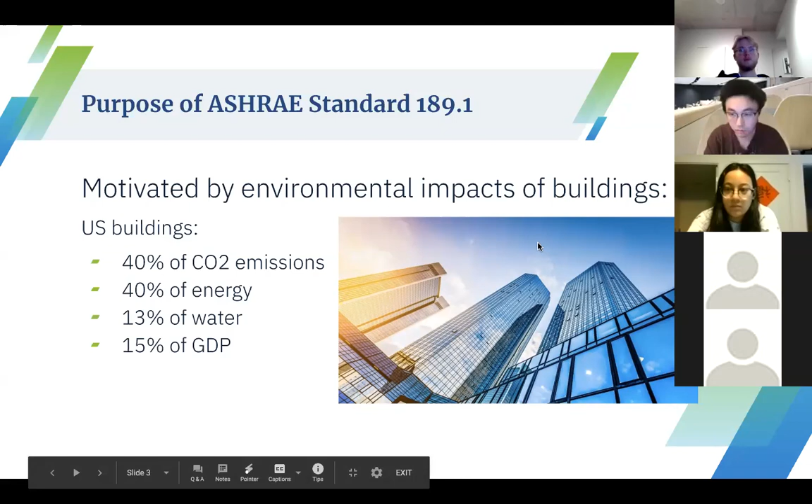Switch to the next slide, please. So the purpose is to create buildings that can increase the environmental and economic performance over time, support the health of occupants, and in doing so, enhance satisfaction and the productivity of the occupants. This is achieved by site sustainability, water use efficiency, energy efficiency, indoor environmental quality, and then the impact on the atmosphere, materials, and resources. We'll go into more detail on each of these in the next few slides.

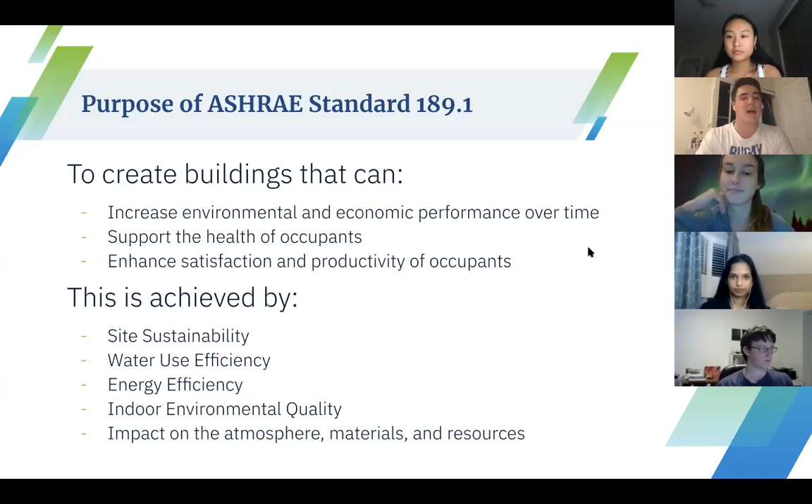The basics is it provides a minimum design requirement for high performance green buildings. And it builds on some of the other codes, such as 55, 62.1, and 90.1. Now, these are not guidelines, but these are actually a standard, and ASHRAE believes they're an indication of future industry trends.

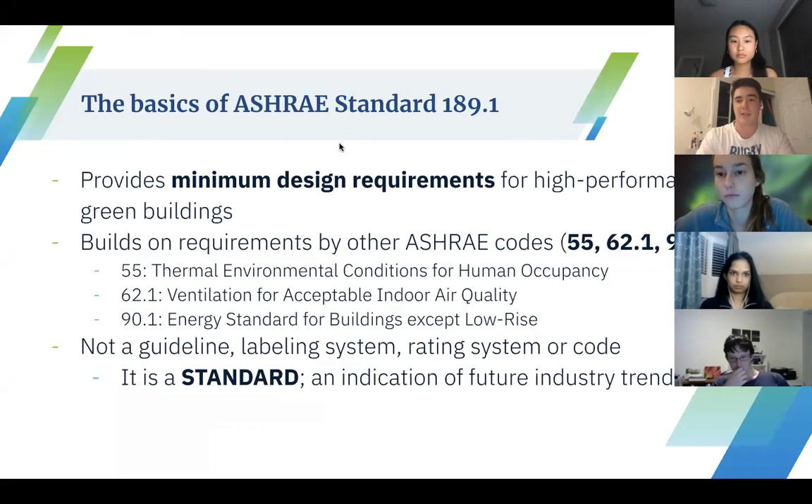So the mandatory elements of this are that it must be built on one of three things. The first is a brownfield, which is a previously developed piece of land. The second is a grey field, which is either an economically obsolete piece of land or an underused piece of land, or alternatively, an existing building envelope.

What it cannot be is on previously undeveloped land, having an elevation of lower than 1.5 meters above the elevation of the 100-year flood, or within 50 meters of any fish or wildlife habitat conservation area. As well as this, it's important that invasive plants are removed from the site prior to the construction of the new building.

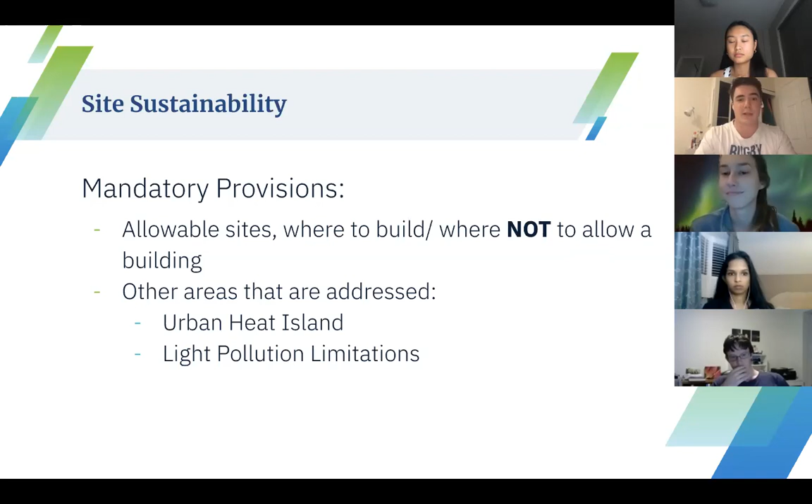Can you go to the next slide, please? Thank you. So there are two major elements with site sustainability that need to be looked at. The first is the urban heat island effect, which needs to be addressed, and there are quite specific measures that need to be taken to do this.

The first one is that 50% of the site hardscape that is not covered in solar energy systems needs to have one of the following: either biodiverse plants, paving materials with a high solar reflectance, open graded aggregate, shading, parking, or a previously existing building that provides shade to this new building.

Walls must be 30% shaded on the east and west, and any vegetation used to achieve this needs to be biodiverse. Roofs must also be 75% covered by either products with a high SRI with a low slope, or if the roof is heavily sloped, it needs a higher SRI.

There are exceptions here for solar panels, heating, and walkways, and this is a good way to save money while still meeting the standard which promotes renewable energy systems.

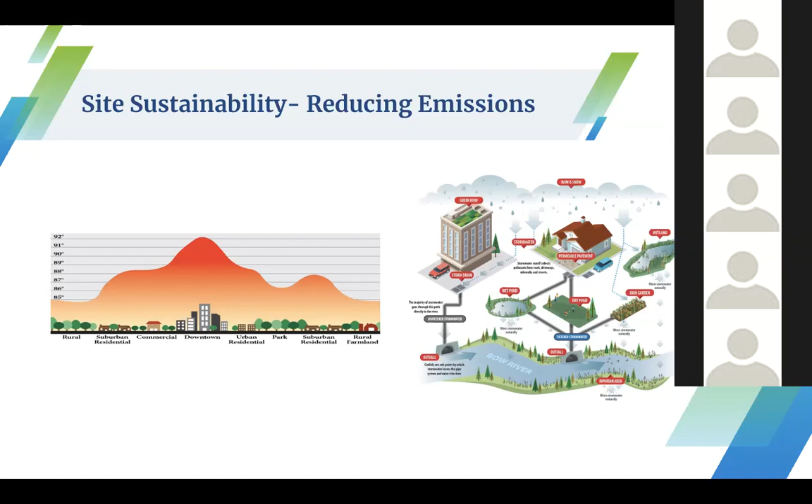Finally, stormwater systems must be provided to the building site. This must be able to manage infiltration, evapotranspiration, rainwater harvesting, and stormwater collection use. It also must be able to achieve a discharge rate of the design storm in under 48 hours. As well as this, contaminated soils are a big problem on brownfields and must be treated to limit the total suspended solids to 25 milligrams per liter.

So the next large part of this particular standard is water use efficiency. Some of the main things that are encompassed in this part of the standard are site water use, building water use, HVAC systems and equipment, and water consumption management. The big thing when it comes to water use is you want to have systems in place, like standards, that allow this water to be consumed as efficiently as it possibly can be.

So some of the systems that are used in water use efficiency include smart water metering, which essentially takes all the different inputs and outputs in water management and makes sure that they're all balanced properly. Depending on the site, if there's a lot of evapotranspiration or a lot of infiltration, this system will make sure that the water is used appropriately in the appropriate places.

One of the big things, especially with landscaping and other water usages that are equivalent to a large portion of water use, is that they can only contain one-third potable water. This means that when you use landscape areas and put water on them, you have to make sure the water used is mostly reused water, which, unless you have a smart system, is really hard to do because you wouldn't have the monitoring system in place.

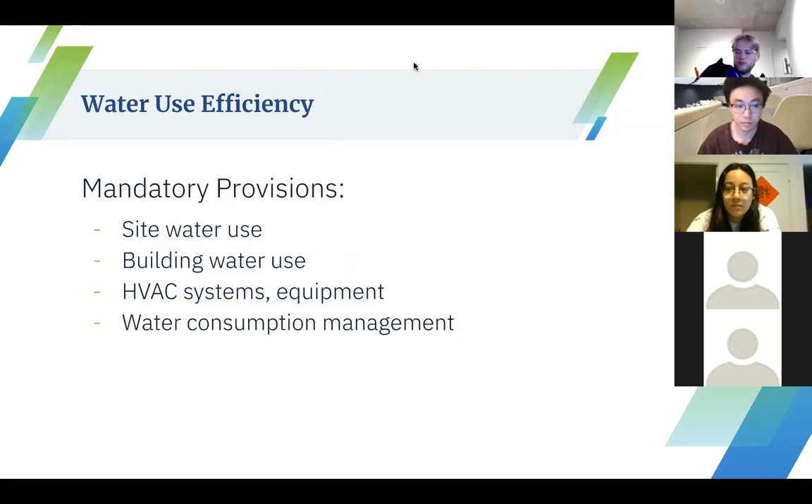Another big thing with water efficiency is Energy Star. Energy Star is a high efficiency rating that the US uses, which basically sets strict energy efficiency criteria and makes sure that you are optimizing the water usage inside of your building. Not only does this save water and energy, but it also saves money that goes towards your electricity bill.

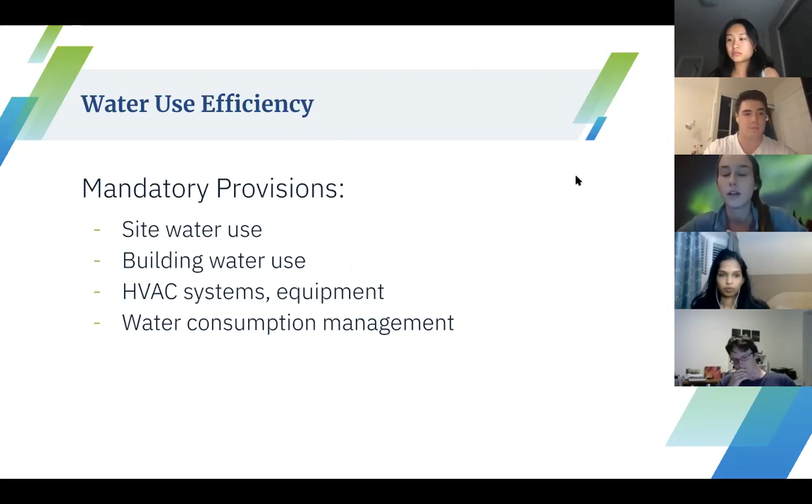So some examples of things you can do to meet Energy Star requirements would be, one, replacing light bulbs for CFLs. And another thing to do with energy is using a 15% less and more efficient fridge, which allows you to reduce your total energy used in a household.

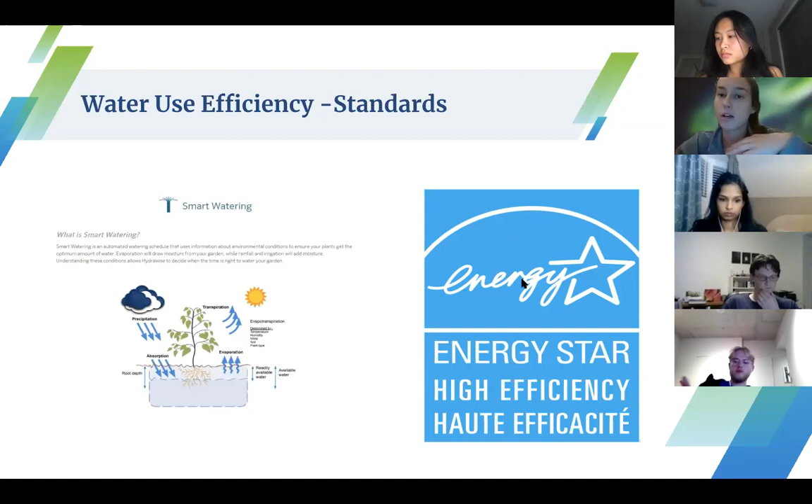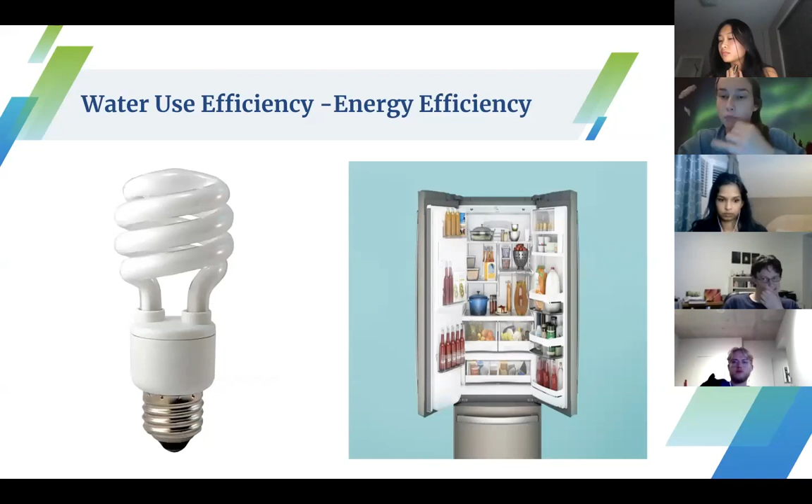Furthermore, a big part of water use efficiency is reusing and collecting. The first system that's really important is gray water, which is essentially when you reuse water that's already been used in your household. You can take the water from different places, such as the washing machine, or anything that didn't have contact with solid waste or anything toxic. That water is collected and then reused in other things that have a lot of water usage, such as a toilet or anything that consumes a lot of water in your household.

And then the other thing is rainwater collection, called rainwater harvesting. This is super important because it basically allows you to collect potable water and store it in a cistern so that you don't have all of your water just coming from the city. You have water that's being collected and used through a system such as natural rainfall, and this will also cut down on your potable water use. Between the two of them, this allows you to use a lot less water in homes, and it's also more efficient in general because you don't have to take all water coming from the distribution system — you can just take water that's already been used in your house or falls on your land.

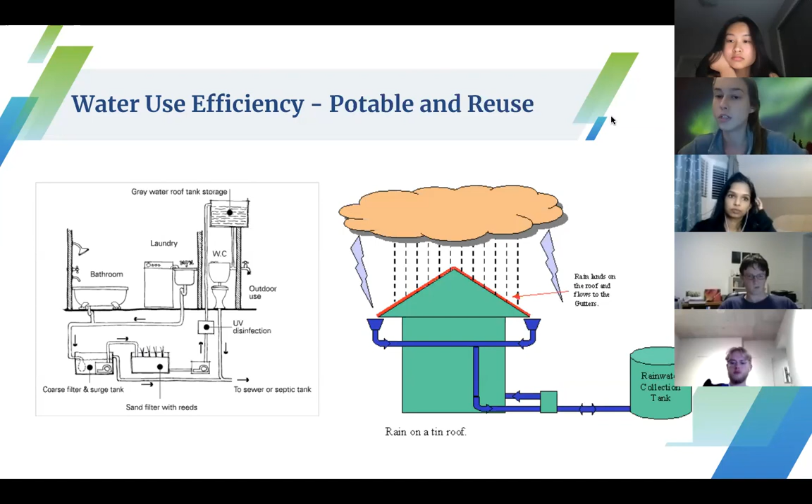The other really important thing about rainwater harvesting is that it also takes water away from the stormwater system, and that's really important because recently we've been having a lot of flooding. So it's really important to have this water go into the building that it's falling on rather than just running off into the streets and flooding things.

So energy efficiency, as Christian said before, part of ASHRAE 189.1 is based on ASHRAE 90.1, which is energy efficiency for buildings. In addition to ASHRAE 90.1, we go into a lot of what ASHRAE wants for energy goals, I would say. Some of the energy goals ASHRAE as a whole strives towards is net zero energy and carbon by 2030, which currently our government is, I guess, going towards very slowly.

Monitoring of progress is based in standardized computer modeling, which is basically knowing how much usage we use in terms of all of our appliances. The most recent goal is to have 189.1 reach net energy use intensity targets by 2020 — that's this year, but obviously that doesn't mean officially net zero. It's just making sure that we have the targets that we want.

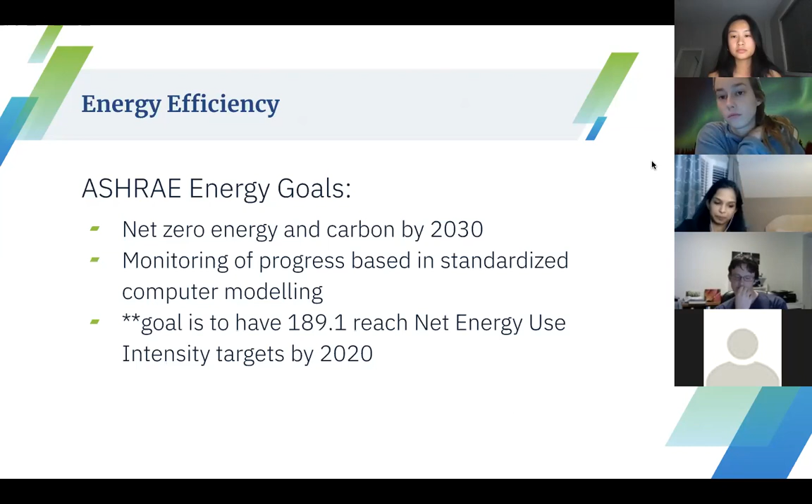Next slide, please. If you look at the graph there, it shows the relationship between 90.1 and 189.1, starting from the mid 1970s. Energy usage across the world has declined due to the stringent standards of 90.1, and even with 189.1, we see a lot of large declines as well.

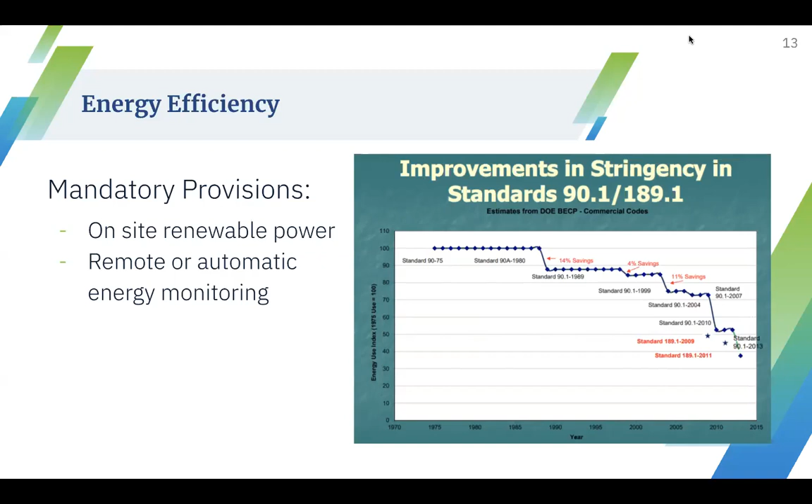The mandatory provisions for this specific category within 189.1 are on-site renewable power, as well as remote or automatic energy monitoring, as we'll go through later.

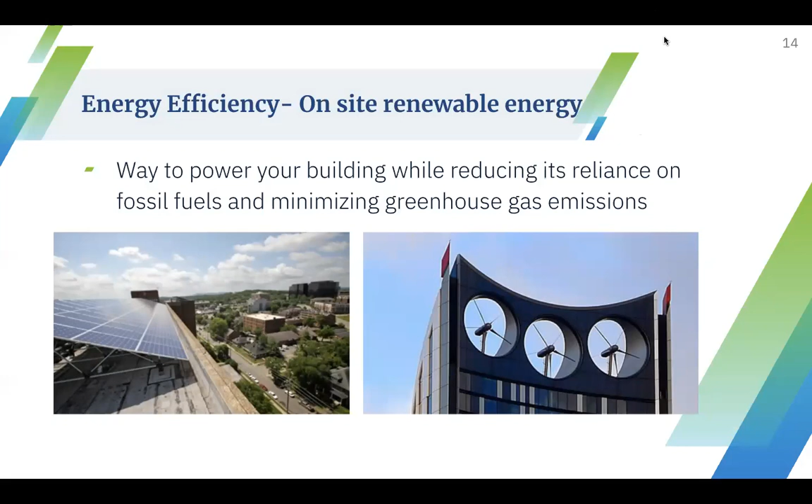Next slide, please. So on-site renewable energy is basically a way to power your building while reducing its reliance on fossil fuels and minimizing greenhouse gas emissions. Specifically, on-site renewable energy could mean PV cells, solar thermal, geothermal, wind systems, or any combinations of those.

Within this category, we want to provide 20 kilowatt hours per meter squared times the gross roof area, specifically because it's so much easier to provide these energy systems on a larger surface within your building site, and most times the only area available is on the building roof.

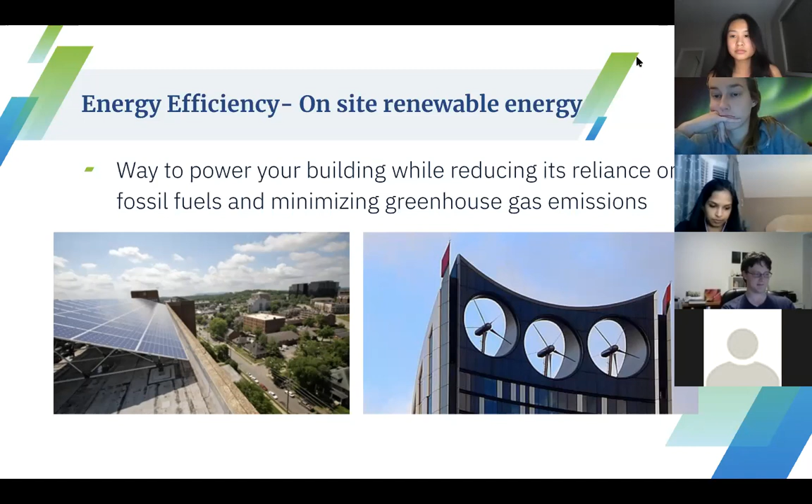If you have a lot of energy efficiency equipment that meet the applicable Energy Star requirements, as Marco talked about in water efficiency, which also apply to energy efficiency, you only need 13 kilowatt hours per meter squared times the gross roof area in order for the on-site renewable energy systems to be applicable. On-site renewable energy plays a very important role in meeting household energy needs throughout the community.

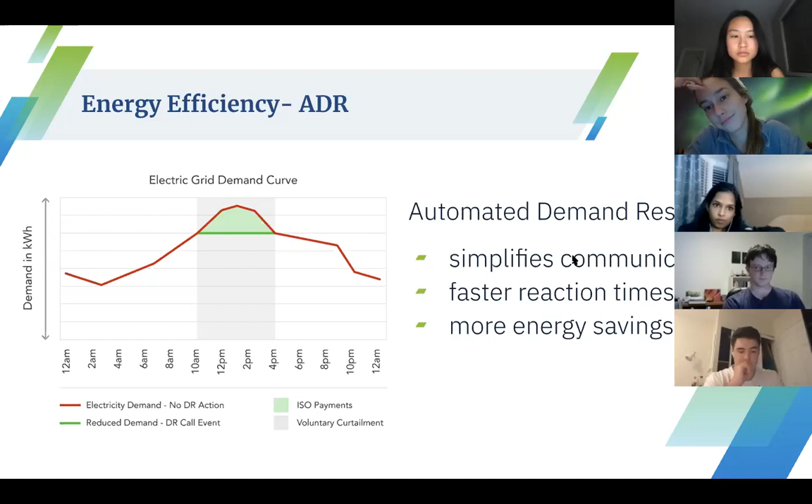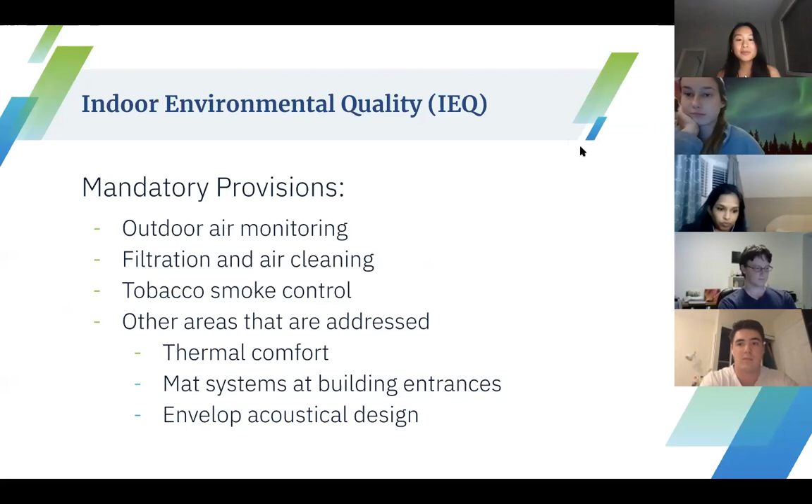So indoor environmental quality - mandatory provisions for this include outdoor air monitoring and tobacco smoke control, and it also addresses areas such as thermal comfort and envelope acoustical design. I'm going to hop in to talk about indoor air quality and how this can enhance building occupants' health, and why it's important to maintain good air quality.

Essentially, air quality is determined by the concentration of particles and gases within the environment. Why is this important, even though air particles are really, really small? Well, while the particles may be puny, it's really important to take care of air quality, because it contains a lot of chronic illnesses, and it carries a lot of health issues that can affect your health.

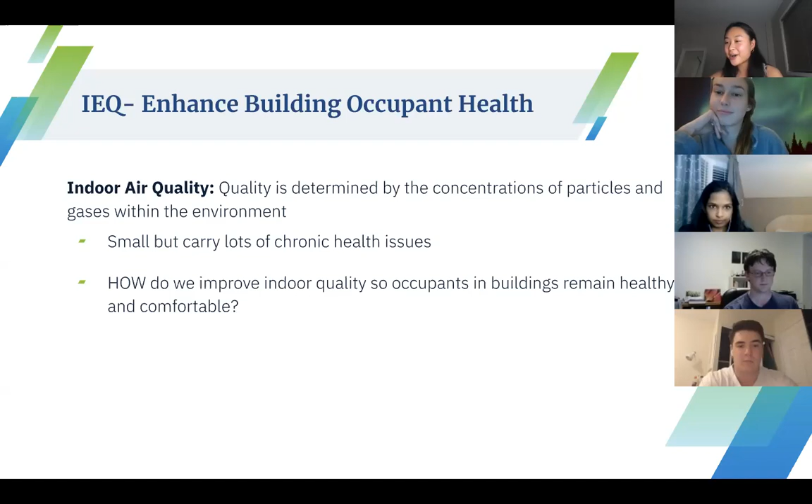To improve this, there are several ways. The first one includes air cleaners. Air cleaners are essentially a device that removes contaminants from the indoor air to improve it. Benefits for this include helping people with allergies, because it removes small allergen particles from the air. It's also good in removing other harmful particles, both chronic and acute. It also removes secondhand smoke.

That's really, really important. However, some difficulties depend on the efficiency of the unit. Essentially it can push back the contaminated air and collect more contamination, which is not good, and you don't want that.

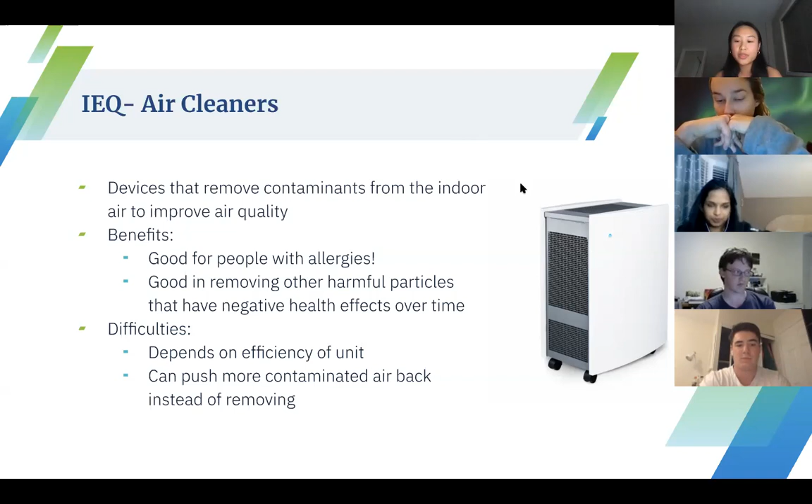The next one includes UV lamps. These are actually really cool - they're essentially ultraviolet lamps that use UV rays to kill bacteria found on surfaces, and mold that can be found in indoor air environments. Our last workshop was actually on HVAC systems, so if you attended that, you'd know a bit more about it, but UV lamps can be used to kill the bacteria found in HVAC systems, because you want to keep your HVAC system nice and clean.

The coil specifically found in HVAC systems can contain a lot of bacteria, so if you keep your UV lamp close to it, it can essentially kill these bacteria before they get into the air that occupies the building. Also, a fun fact - there's been some talk about implementing UV lamps in indoor spaces to reduce the spread of COVID. However, this might not be as effective due to UV lamps needing direct exposure to the virus.

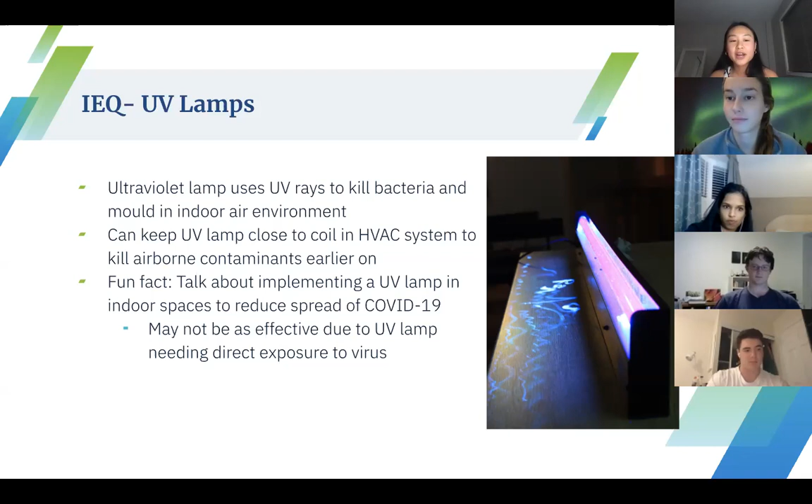But yeah, that's in the air right now. So that was just a little fun fact for you guys.

The last one I'll be talking about that can help improve indoor air quality is humidifiers and dehumidifiers. Back on HVAC, because we love HVAC here in ASHRAE. In the winter, HVAC systems usually have higher temperatures, which dries the air inside the building or home. Dry air can actually lead to respiratory issues for occupants, which is not good for your health. So humidifiers essentially add humidity to the air, usually in the colder seasons, and the ideal range for humidity is about 30 to 40% for buildings, for you to be comfortable.

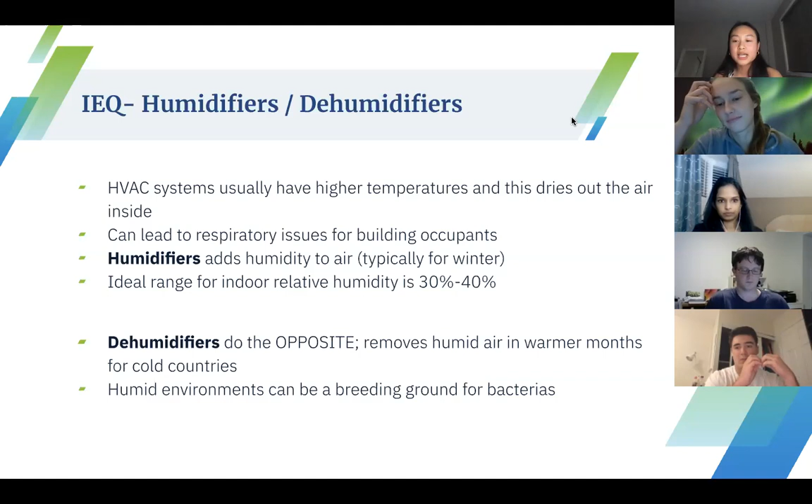Dehumidifiers do the opposite, of course. They remove humid air in the warmer months for colder countries, because humid environments can actually be a breeding ground for bacteria, so we want to take the humidity out as much as possible.

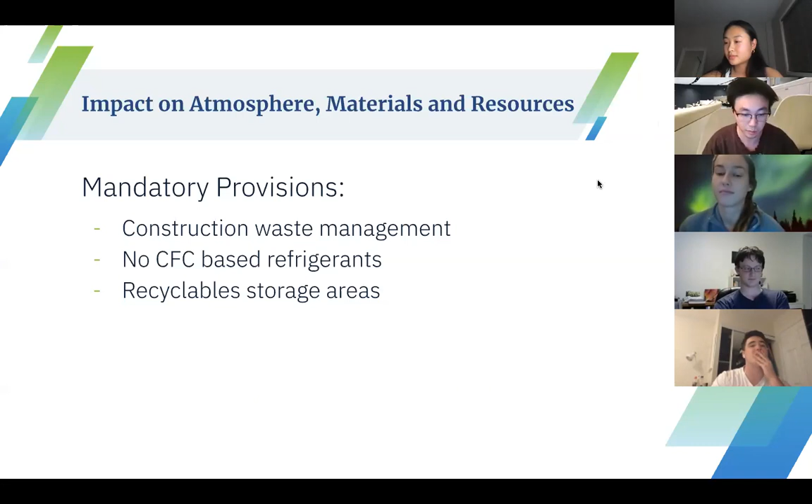I'm going to be talking about the impact on atmosphere, materials, and resources, because we want to be sustainable. The mandatory provisions here are construction waste management, no CFC-based refrigerants, and recyclable storage areas.

Now I'm going to talk about how we want to promote sustainable materials. As you may know, industrial buildings nowadays are made mainly of concrete, and producing and manufacturing this concrete requires a lot of embodied energy. Embodied energy is basically all of the energy required in the process of creating a product from start to finish. Using a life cycle analysis, you can see all the emissions that a product creates, and from this you can see that concrete creates lots of embodied energy, which is unsustainable.

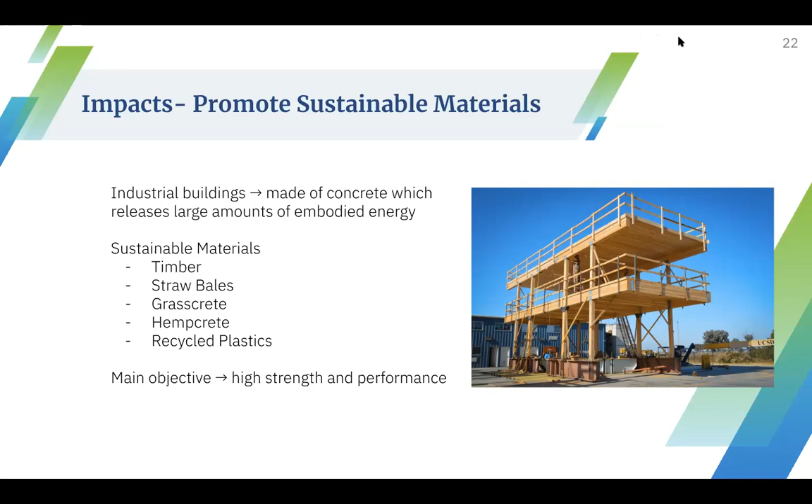Now I'm going to talk about some sustainable materials we could use for construction. One commonly used one would be timber, used in mass timber construction, where the building is entirely made of strong, fire-resistant wood. The difference between mass timber and concrete is that it weighs one fifth of a concrete building, meaning it actually reduces the embodied energy. Another plus is that timber use is sustainable and it absorbs carbon dioxide as it grows.

The next one would be straw bales. This one is a bit weird, but it has been becoming more common in small buildings. It's used inside building frames and can be used as insulation, plaster, or gypsum, providing a high level of insulation. The benefits are that since it's using straw, this material is very cheap, sustainable, and easily renewable. So the next one would be grasscrete.

Grasscrete is basically concrete, but less of it, where greenery and grass is able to grow on the concrete of floors, walkways, sidewalks, and driveways. The main benefits are that we can reduce the amount of concrete and embodied energy, and also improve stormwater drainage and absorption.

The next one is hempcrete. This is basically another form of modifying the concrete. It keeps its performance levels but implements sustainable materials inside of the concrete. It's made by binding fibers from hemp plants to the lime during concrete processing, creating a sustainable building material we can use.

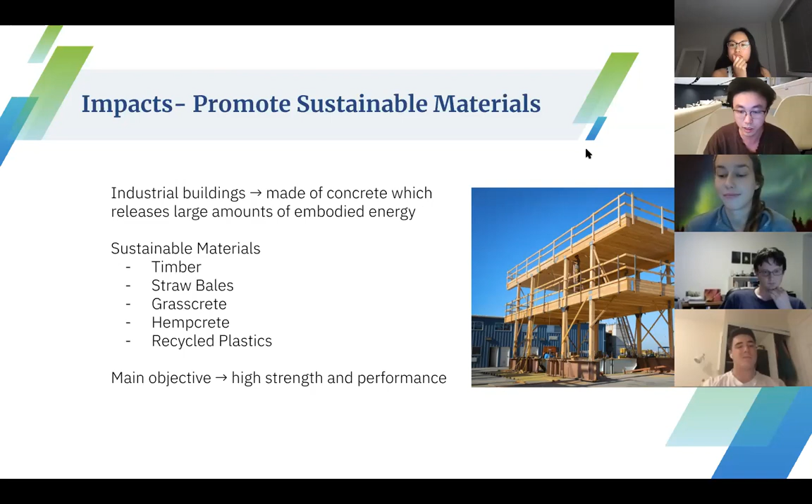The last one is recycled plastic, which allows for a lightweight solution that reduces embodied energy of concrete. Since it's a reusable material, it offers flexibility in designs and is easier to mold so you can get the concrete shape you want. Overall, after talking about all these sustainable materials, the main objective is to keep the structural integrity of buildings, and any sustainable material can be used as long as it has high strength and good performance.

Now we'll be presenting a capstone project from last year, done with my teammates Will Banks, Noah Cassidy, Ivan Priono, and myself. It was about designing a high-performance home in a native community called Attawapiskat, Ontario. We designed the house in terms of the standard, but also a lot of other things. Today we'll just be talking about how it could be relevant to the ASHRAE standard as well.

So safe to say it's a really remote location and transportation up to the site is really difficult. It also has a really harsh climate because it's in Northern Ontario, and it's kind of like a flat plain, so there's lots of wind, lots of snow, and it's just not as warm as Southern Ontario is.

The main issue we were given was to deal with the native housing crisis up there. For those who don't know, native communities actually have a lot of overcrowding issues because lots of families average 6 people per family. They live in these houses pretty much sleeping in the same room as their siblings, families, and parents. This also causes a lot of respiratory illnesses because of mold and things like that growing in the houses, and this also leads to mental health issues, just because they're in these confined spaces with no real place for privacy. So these were kind of the things we were dealing with when we were given this problem.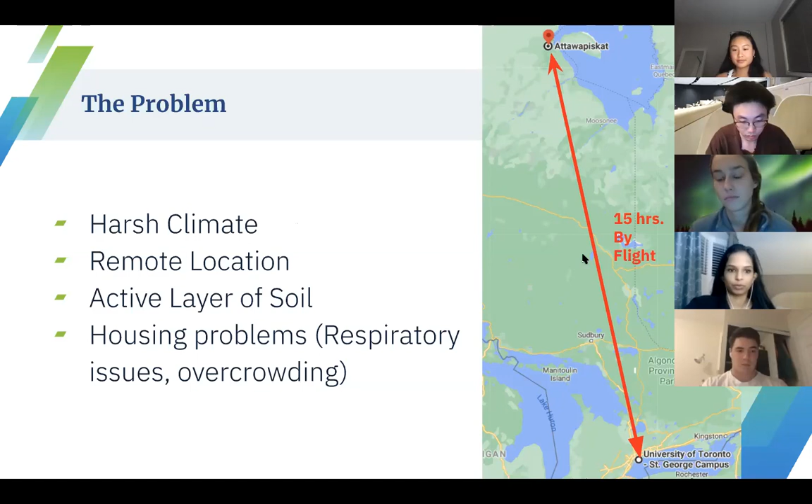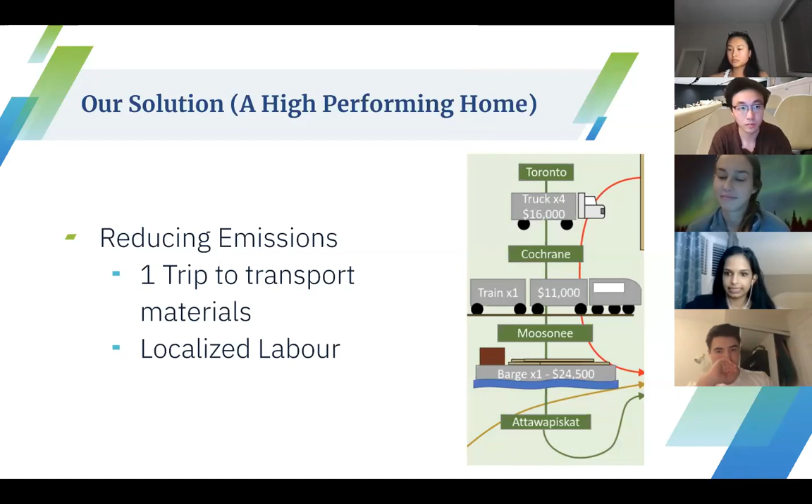The first part was how we addressed reducing emissions. Like we said, the native community was really far north, so if you think back to the life cycle analysis, if things are built out of embodied energy, just transporting them also emits a lot of greenhouse gas emissions. One way we tried to reduce this was making one trip with all of our materials. That required 4 trucks, 1 train, and a barge to get all our goods up to Attawapiskat, so it wasn't just a 15-hour flight. This reduced the number of trips we would take, which also reduced the greenhouse gas emissions.

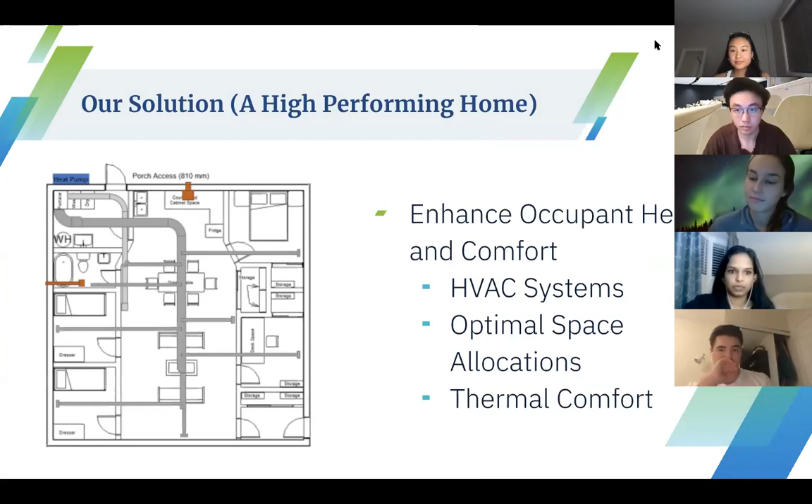Another thing we addressed was enhancing occupant health and comfort. One thing we implemented was a heat recovery ventilator, which we covered in previous workshops. This is the HVAC system that expels stale warm air into the outdoor environment, but as it pulls in new fresh air, it mixes with the outgoing warm air, capturing its temperature so that when it comes into the home, it's fresh air but also warm. This reduces heating costs but also makes the environment a lot warmer.

Another thing we used was a wood stove. This is partially because of cultural practices, since native communities do a lot of cooking with natural fires, but it was also a faster way to heat up the home in winter, just because it's such a harsh climate. So we needed the heat to be a little extra during those times.

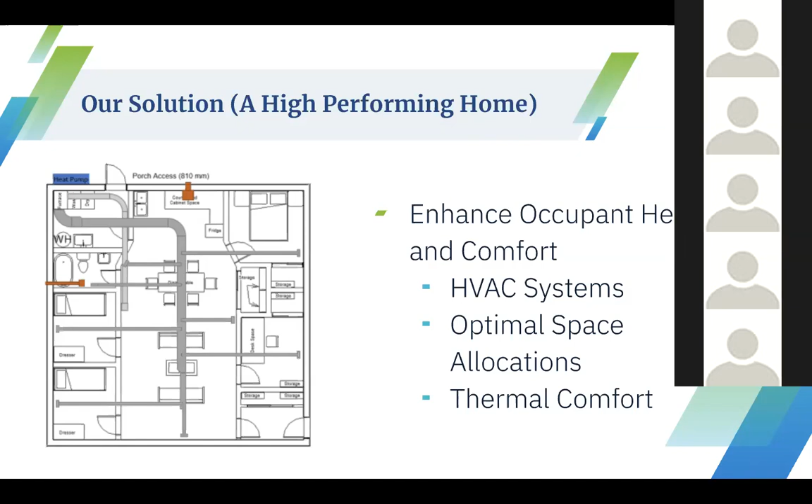Another thing we had to deal with was the foundation. The home was actually on an active layer of soil, so how we addressed this was by using a triodetic foundation, which basically moves along with the soil so the home doesn't feel like it's moving. We had windows on the south side of the home, because you mainly get a lot of solar heat gain from the south in Canada, or just in the northern hemisphere in general.

So by putting windows on that side of the home and having a large space, we were able to take the benefits of the sunshine periods during the day as well.

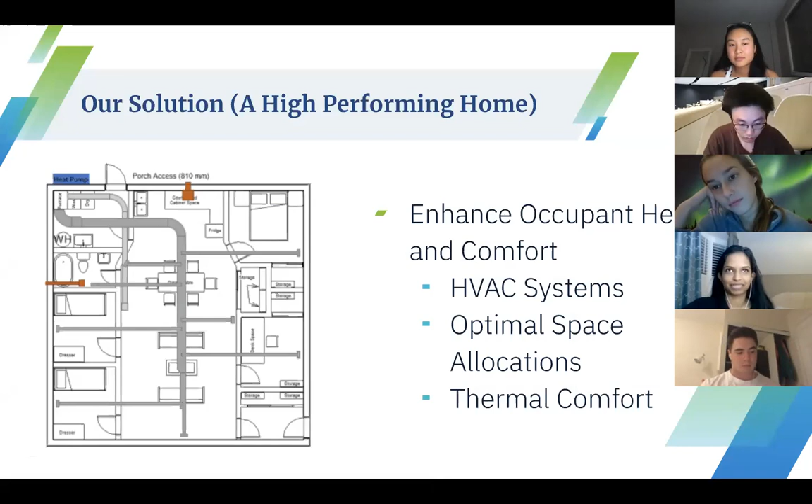I'll be talking about the software we used to figure out which materials we were going to use for our building enclosure and envelope, and the process, the inputs and outputs, and how we used that information to come to our conclusions. The two software we used for our project are Therm and WUFI. You'll probably work with those sometime in your undergrad if you continue taking building science courses.

Starting with Therm. Therm is software we used to assess the thermal performance of our building envelope. You draw out the assembly, the layers, and the framing. The main reason we wanted to use Therm was because it did a good job providing an accurate R-value of our building envelope. In undergrad, the main way you learn to calculate R-value is through one-dimensional analysis.

What Therm did was more of a 2-dimensional analysis, which came in really useful when you have things like studs for the framing that act as thermal bridges with a heavy 2-dimensional impact. As you see in figure 29, we have a stud or framing member at the end.

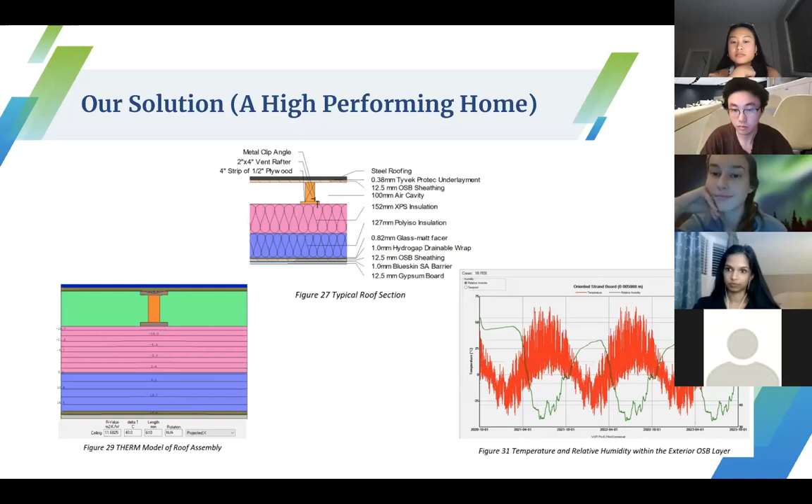We wanted to ensure that the building envelope we created would prevent bulk water and vapor from condensing within our walls and accumulating, because when water accumulates in the walls and isn't let to escape, that's very detrimental to the building enclosure, especially for a house like this that uses wooden frames. After a long time, you're going to get your wooden components rotting, and you don't want that.

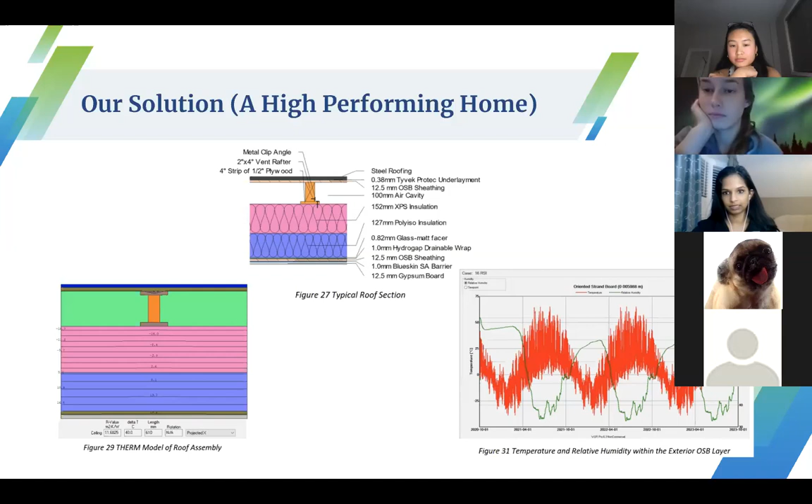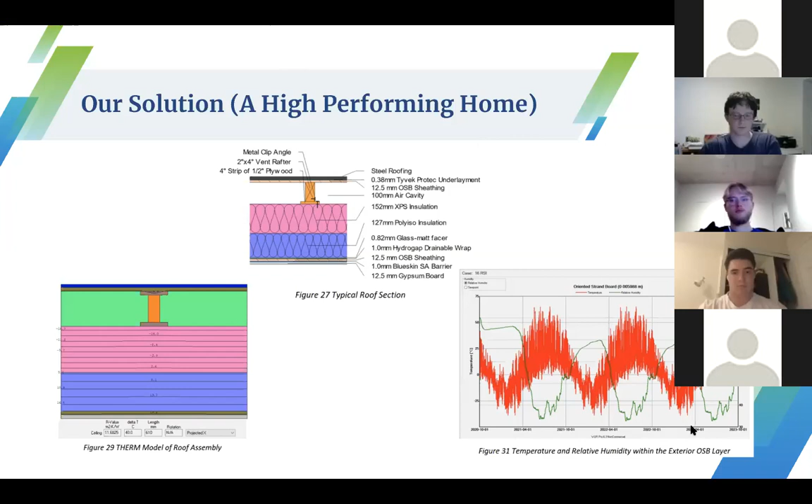The way WUFI works is like Therm — you specify the different layers and their properties, and simulate it for however long you need. In figure 31, we simulated it for a 3-year period from 2020 to 2023.

In that graph, relative humidity is shown in the green line and temperature in the red line. What we're looking for is to make sure the relative humidity in the wall doesn't reach or exceed 100%. When the green line reaches that point, condensation is happening in our walls. As you can see in figure 31, it never reaches that point.

The maximum is around the 50s, which is pretty good considering the temperature gradients we had to work with. You notice the spikes in winter as expected, but it goes down eventually in the summer. That shows our building envelope allowed the wall to dry, which is really good because we don't want water accumulating. That's what you'd be using WUFI for.

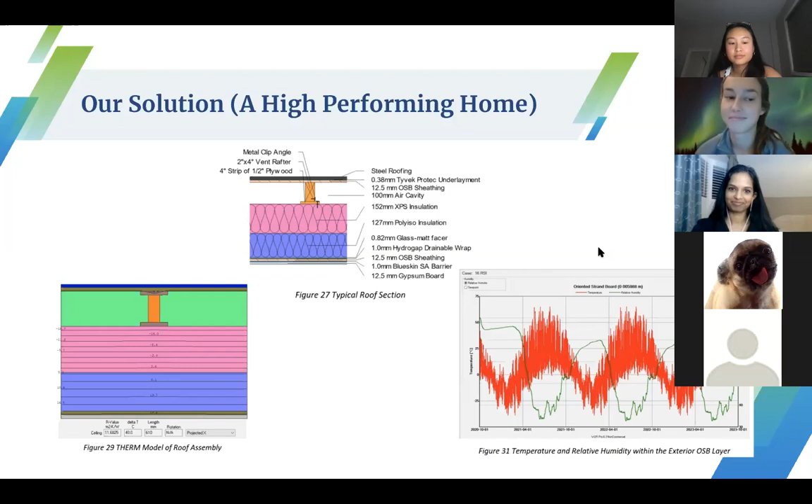Very useful software. That's about it in terms of the analysis software we used for our walls. I'll pass it over to Will now, who's going to talk about the potable water.

Thanks, Ivan. So transitioning to water - in Canada, we tend to take clean drinking water for granted, but there are actually 61 long-term drinking water advisories for public systems on Canadian reserves. This is something the federal government is trying to tackle, but it's been years and there are still many advisories.

Attawapiskat declared a state of emergency last year over excess levels of a couple of chemicals which pose cancer risks. In addition, the town has had drinking water issues for decades, and elders would comment that they don't remember a time they could ever drink the water from the tap.

We tend to think about high-tech solutions as engineers, and there are many great innovative products, whether it be glazing or building materials, or in this case filtration systems. But you always need to be careful about context, especially with a remote community - you need to make sure your solution is feasible both in cost and implementation, and especially in maintenance, because if you implement a high-tech solution and it has a problem requiring specific knowledge, you can't be flying someone out from Toronto to Attawapiskat all the time to fix it.

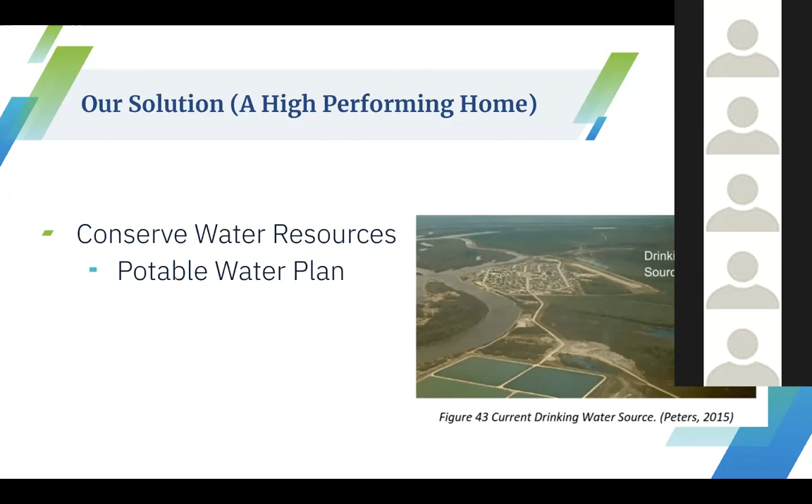We found that basically the water crisis required a total overhaul. In addition to water quality itself, we found that community demand is more than twice the capacity of the local water treatment plant. So essentially they have a broken system, and you need to go to the source instead of an end-of-pipe solution. So we recommended a whole new water treatment plant and moving the water source upstream on the Attawapiskat River.

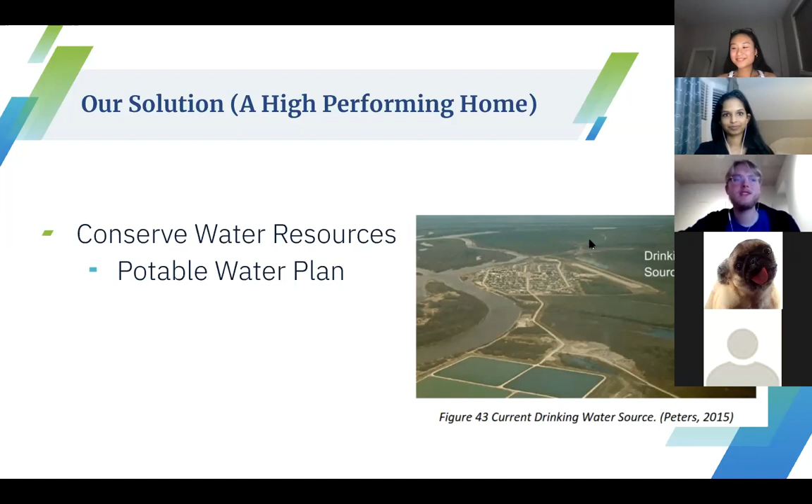So that about covers it for water. I'll just mention too, I did the renderings and some 3D modeling for the project. I'm a big fan of Rhino and Grasshopper - if anyone's checked those out, and if you're interested to learn more, you can reach out to me. Thanks.

Another part that we covered - sorry, this wasn't in our specific design, but something that came up in our research - was the sustainable materials that Andrew mentioned earlier. Straw bale homes are actually used a lot in Native communities, because of their high thermal insulation characteristics.

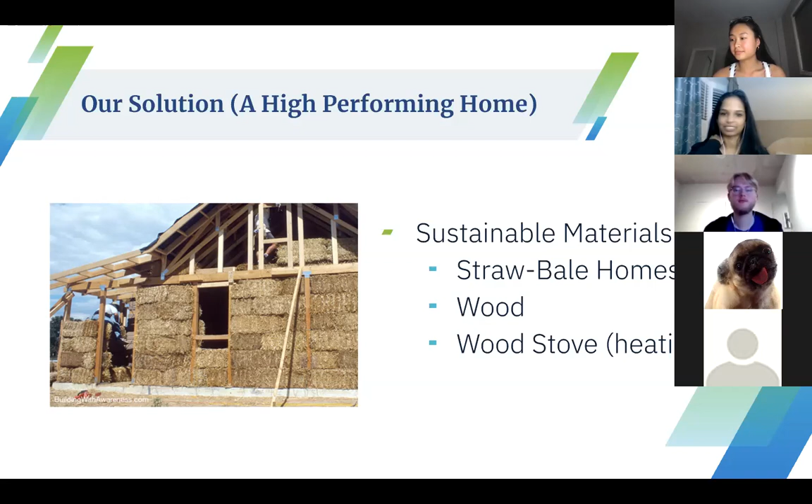Also, our home was made out of wood primarily - we had the wood stove. So these were ways we addressed sustainable materials with these kinds of innovations, but we did not use straw bale homes because for our thermal insulation we just used something else instead.

The building quality was measured using something called HOT 2000, and I'll pass it on to my partner Noah to describe what we did with this one.

So in the end, as part of the project, like Simone mentioned at the beginning, we had a couple of constraints - our cost constraint, but our other big constraint was the energy demand, or energy use intensity, the kilowatt hours per meter squared of floor area. Instead of doing manual calculations ourselves, we put everything into this program called HOT 2000, and it spits out a number that tells us how well our design is performing.

I just wanted to take a moment while we're talking about this to emphasize how our design process worked while we were going through all of these choices we had to make. For our project, we had a limit of 80 kilowatt hours per meter squared annually, I think is what it was.

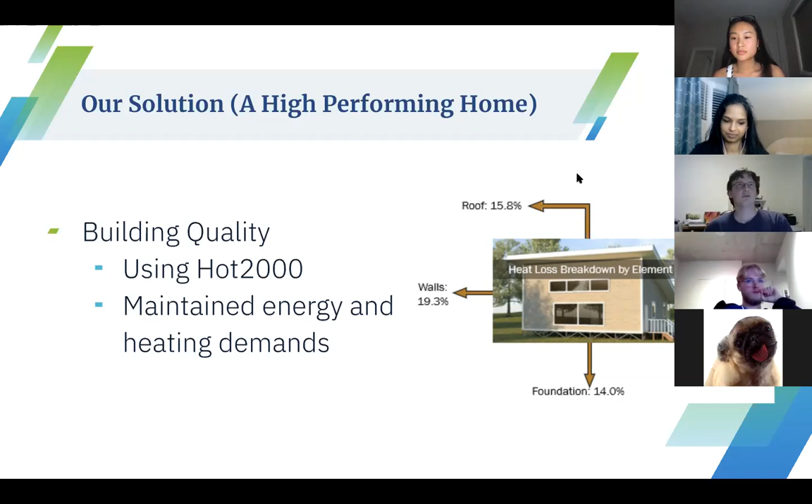HOT 2000, it's kind of a primitive program. Generally, the industry standard is to use Energy Plus, from what I've gathered. But we're using HOT 2000.

You have to find weather files for your area, which is a whole other struggle in itself - trying to work with the very old standards that HOT 2000, and I think Energy Plus, use for weather files. I'm trying to get that to work in the program and trying to find a weather file that accurately represents your area. All these things take a lot of time, and they're a huge challenge. But to get an accurate model, you need accurate data, so it's kind of worth it.

You're going to input your weather files, your window to wall ratios, the materials that all your walls are made of, the thicknesses, the stud placement, and all these separate things. And you build a little model of your home, and then it spits out some numbers.

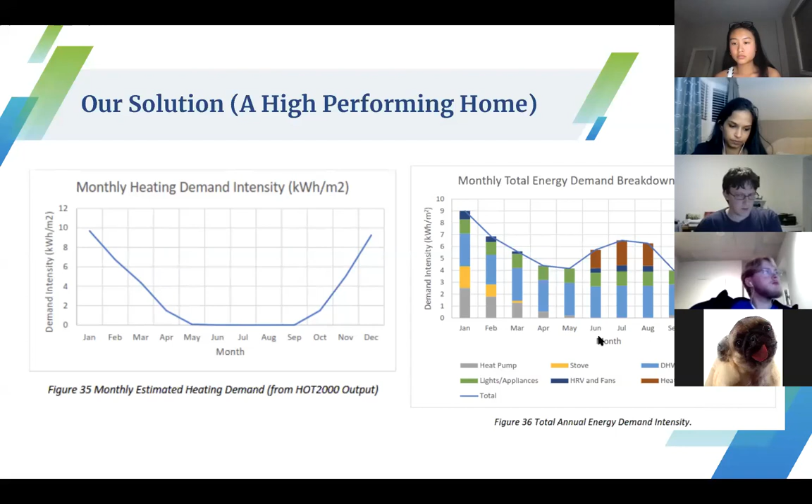Yeah, I think that's all the important parts of HOT 2000. I mean, I can keep talking, or Simone, you can just...

Thanks, Noah. The last part of the standard was how you can make your buildings resilient to natural hazards. One thing we did was implement a porch element on the north side of the building, kind of northeast because of the tilt the house had. This added an extra unconditioned space against prevailing winds in Canada, which come from the north and west. It acted as an extra barrier so the house enclosures wouldn't get direct wind pressure, minimizing the pressure-driven effects of wind and snow hazards in this area.

Another thing we did was use impermeable vapor barriers, implemented in all of our enclosures. This was to make sure all enclosures were as continuous as possible, because the second you have an air leakage anywhere, it becomes a small space that all the air wants to rush through, which can be super detrimental to your design.

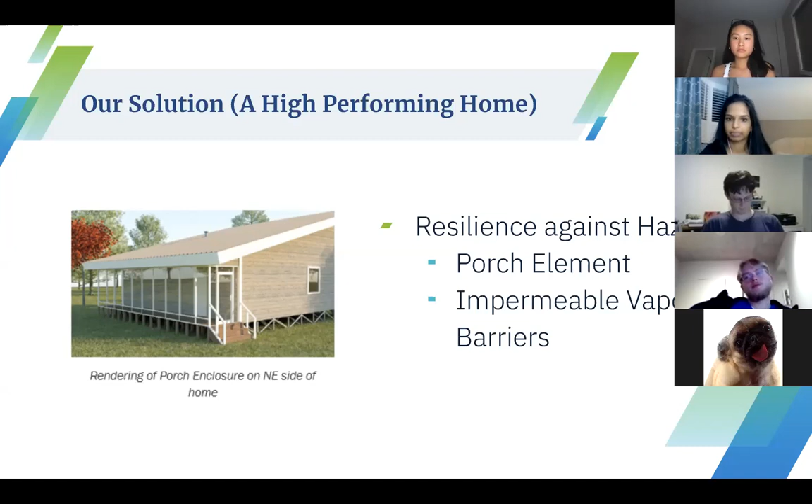So that was our Capstone project, and how it applies to this ASHRAE standard. If you have any questions specific to the project, you can ask my teammates and I, but I believe this is also the end of the presentation.